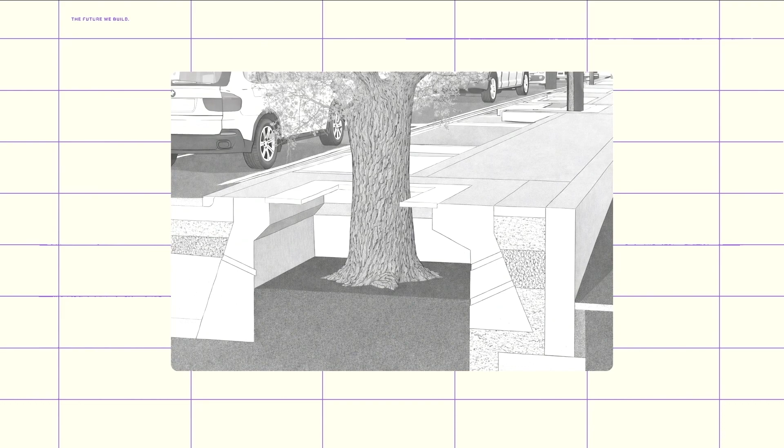We have to find every little nook and cranny in the city to hold water. Our roads have to trap and store water underneath them. If this parking lot was changed to be a filtration system rather than cemented asphalt, we could be storing water there, and it could be trickling slowly into the aquifer when there's space for it to sink in. We need to find environmental flood mitigation solutions that also provide a benefit to society, like parks, like green space, like walkable neighborhoods.

Giralda Plaza is the nation's first living street. That is a system of porous paving and subsurface soils. It's a plaza, a lot of concrete, a lot of stone, but underground it has all the systems of the urban forest. This space is resilient because of how much water it's able to absorb, much like the wild places of the Everglades.

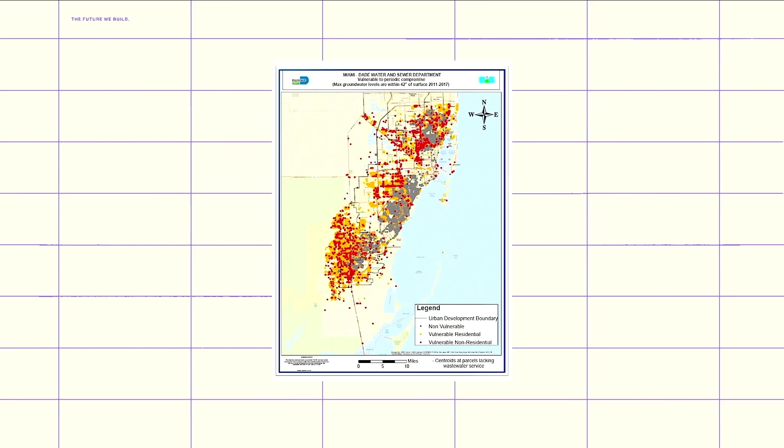We have multiple types of infrastructure that are already failing as a result of sea level rise. So septic tank is one of the ones we have an answer for. 50,000 plus properties in Miami-Dade County in 2025 don't have proper waste infrastructure in their homes because the groundwater level is so high and so close to their septic tank, it's not being cleaned. And that's both a public health risk and an environmental risk.

It's estimated that to get all 120,000 urban septic tanks removed, it would cost about $4 billion. If we don't...

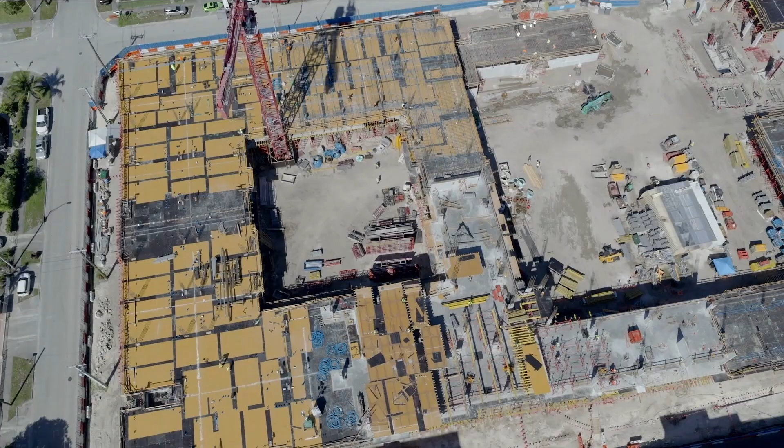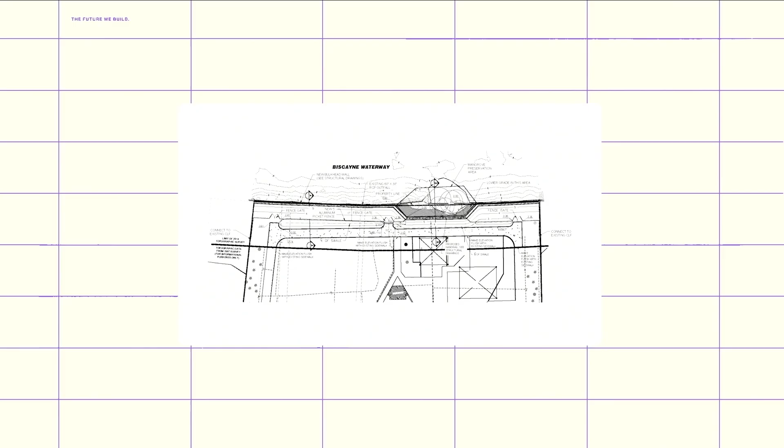We need planners working for our cities with that mindset. I think there's a lot more talking about the plans and the problem than there has been actual money towards investing in fixing the problems. We haven't seen comprehensive plans. Without a plan for what we want to do, it's hard to attract money to pay for that plan.

It's been made very clear by our federal administration that it's up to the state. I'd rather see the states take care of their own problem. And the state is going to tell us it's up to the locality to determine what the best path to resilience is, because that resilience is very localized.

You need to get all of those people to come together and say, we need to produce a bond issue to pay for it, which is then going to increase our taxes. But we're going to get that done to protect our houses.

So there's a need for shared thinking and action beyond what we are accustomed to. It will require an educated community that cares about the issue. Doing nothing will be the most expensive thing we've ever done, and we'll learn that in 50 years. The Miami of the future and the way things are now is a Miami that won't exist, because at some point, it'll only just be a few people here that can live in this place.

We have to think differently about what infrastructure looks like, what an urban landscape looks like, and how we tie nature and green spaces in. So we have to create new economic models that are dynamic, much like nature, and able to work with the cycles that nature has. We have examples that this is possible and that this works. We need to be deploying this at scale and really thinking differently about how we're building the future of Miami.

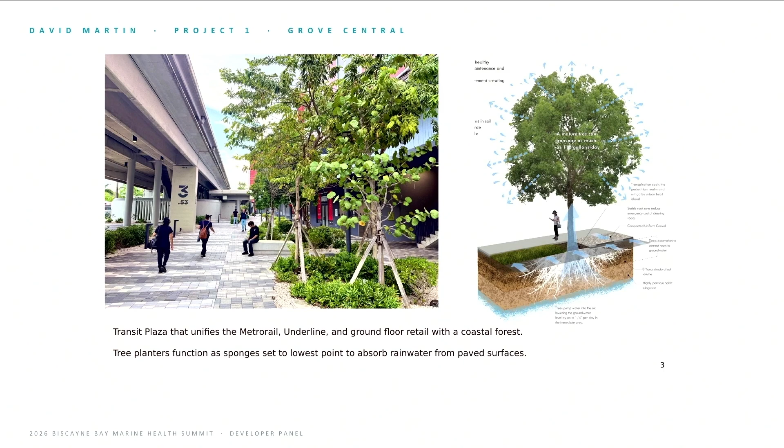This was an ancient pine rockland—100 years ago, where the Metrorail was built. A lot of this was regenerating both some of the pine rockland, from a biodiversity perspective, but also bringing some of the coastal natives along this ridge to support the pollinators that follow the coast. We even put a cliff forest in this project, a forested facade—Miami's first, similar to what you see in Milan, focused on natives. The goal is finding ways in the most urban and civic environments to weave nature into it, giving it a position even in its wild form within the frame of the city.

So this is active city making. This is a TOD, a county ground lease. We built 400 apartments that have some affordable and workforce units in them, and we created a lot of jobs, orienting all the retail—there's a Sprouts grocery market, et cetera—to the Underline, which Juan will talk more about, and the transit station, which I think was pretty cool.

This is a new concept that Walter's pushing me to think about, which involves two things: one, how do we manage stormwater, and how do we clean the stormwater so we could start getting some fresh water into the bay?

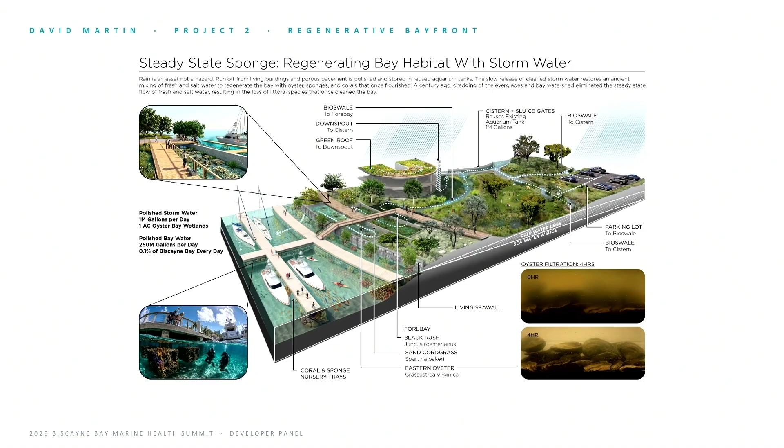What that would result in is a plume of clean water coming off these docks. So you'd have a net positive impact for about a $2 to $3 million investment per marina. That's not a lot of money relative to the types of investments, and that's just the salt water side. We're talking 250 million gallons a day being polished per marina.

But now we shift to the freshwater conversation. Can the buildings be living systems? We're managing water from the sky to the ground to the bay. And the reason we don't have oysters anymore in the bay is we've dredged out all of our channels, so we lost the steady state flow.

So the meme for the day is restore the steady state. Bring back the fresh water, let it flow slowly into the bay, not too much fresh water after it rains and not enough in between. Then we get those oysters that do all the incredible work we know oysters do, 2,000 gallons per day of polishing. You see a photo on the bottom right of 4 hours of polishing in a 1 cubic foot of oysters.

So we have these tools, but we have to support the ecosystem to give us those ecosystem services. And we have to work upstream of the financial decisions. We have to put science at the beginning of the financial decisions, and that's done in legislation, but also working in the marketplace through public-private partnerships so that science, art, design are all up front and not on the back receiving end when all the financial decisions have been made.

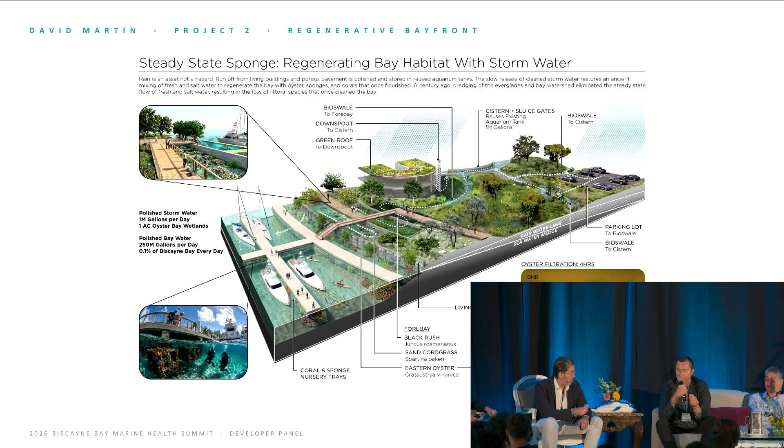Juan, you've been involved in the design and planning of the Shoreline project, and I learned from you that this is possibly the largest infrastructure project in the country that reclaims impervious asphalt and turns more than 11 acres into permeable, usable public space. Can you please take us through the design thinking process for the Shoreline?

Sure, thank you. So I don't have all the numbers like Walter. I don't know if you wrote them all down. I wish I had a notepad.

To us, it was a very simple and very clear opportunity. We had this opportunity to work on it with David and Gene Stearns, who brought us in with a crazy notion, which was how do we change the way that the Rickenbacker Causeway works. If you've ever worked with infrastructure of this magnitude, you'll know how difficult it is to work with different agencies. But for some reason, and this is one of those things in these projects, you never know if the stars will align. In this one, they did.

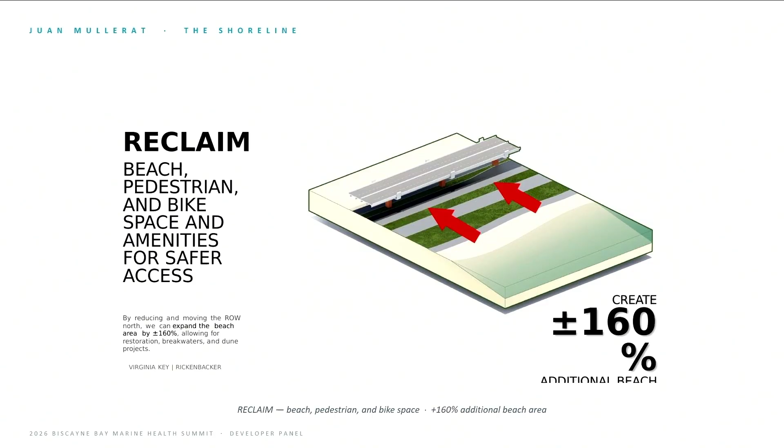There are other nicer places, so the goal is very simple: make that a destination, a real beach, a place where we can remove some of the infrastructure impact that the current causeway has. Push it up onto a viaduct, and in that way gain a whole bunch of open land underneath that could be devoted not just for people, but also for the ecosystem to reclaim the area that really should be for pedestrians and bikes instead of cars.

Currently we have 48,000 trips going from one end to the other of Virginia Key, 28,000 of which are just going directly from inland to Key Biscayne. If we were able to remove only those 28,000, we could increase the amount of space and reduce the volume of cars on the ground, slowing them down to the point that it could be, as a commissioner called it, a residential street—really a calm access road that would be friendlier to bikes and pedestrians.

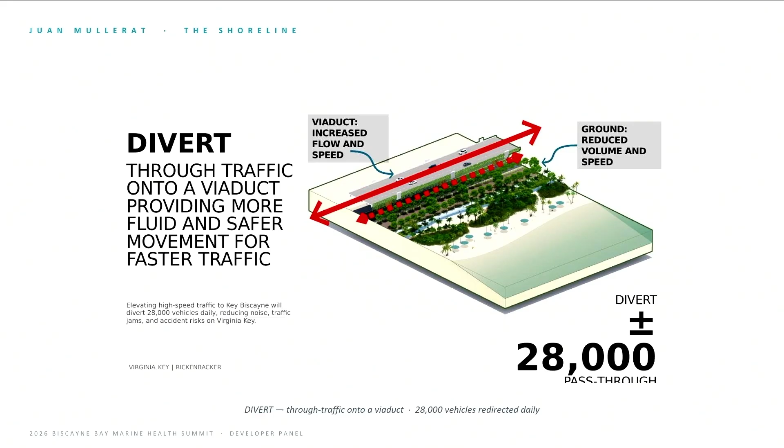So as you can see, I'm giving you some numbers, but the idea again is very simple. The amount of space that those 9 lanes take on the ground level could be really wonderful—is that my last slide? I had some really sexy renderings, I don't know where they went. But this is a project that is ongoing.

It's a public project. We're working together with the Underline—the reason it's called the Shoreline, well, I guess I don't have to tell you, you're all smart people. It's what we call the little sister of the Underline, an extension of it. Right now the Friends of the Underline are working with us together with engineers, and we're working with the Village of Key Biscayne, the City of Miami, and the County to figure out whether or not the project is feasible.

The good news is that we are halfway through the project and it's still feasible.

Eventually what we're going to see is that we'll be able to provide not only a larger beach for enjoyment, but also additional dunes. The ecosystem can then be restored. A 20 to 35 foot wide multimodal trail, similar to the Underline, and then additional parking and additional bike lanes that will go along the causeway street underneath this viaduct.

The project will also add amenities, which that area currently lacks, and it will reduce the crossing distance for pedestrians and students. If any of you have been to Mast, at lunchtime the students cross those 9 lanes to get a taco. That only goes to show how terrible school food can be, because they take their lives into their own hands to cross that thing.

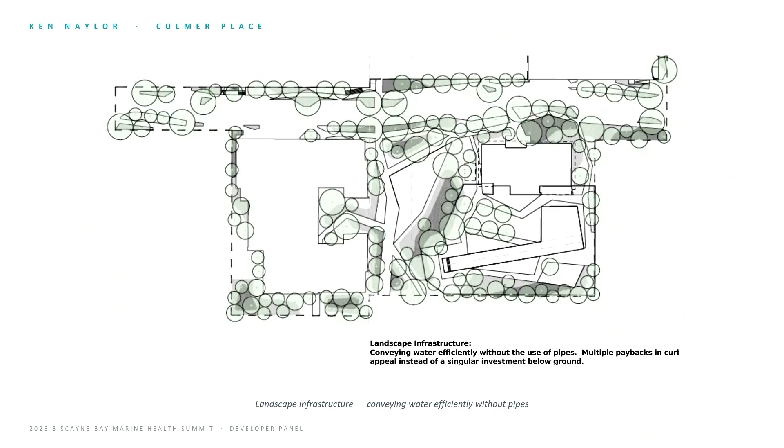As a funny aside, we did have one federal government employee come down from Washington and look at the design of the rain gardens when it was just conceptual and go, I don't know, is this going to be safe? Are the kids going to fall in and die? So there is resistance to this stuff. David talked about some drainage systems you don't know whether they're going to work until you actually implement them. People don't understand that humans can live without every inch being paved.

This image shows how the superblock was broken with this north-south spine running through the site, and that was very important from a planning standpoint, just to be able to reintroduce normal pedestrian and vehicular traffic through the site.

The pool that you see depicted there is really a piece of pride for the residents. They never had, historically, access to pools. Many of them never learned to swim as a result. So the fact that we were able to deliver them a pool was a big deal.

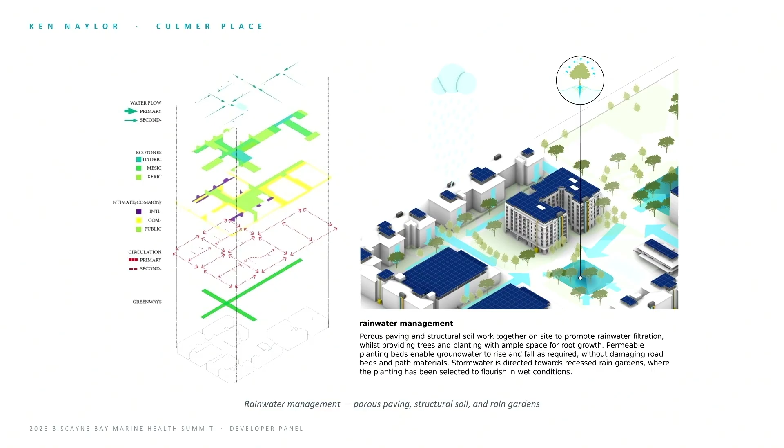As you can see here, there's a rainwater management system that Walter designed that creates a lot of porous paving, structural soil work, and the rain gardens that I mentioned previously to divert the water to the right places.

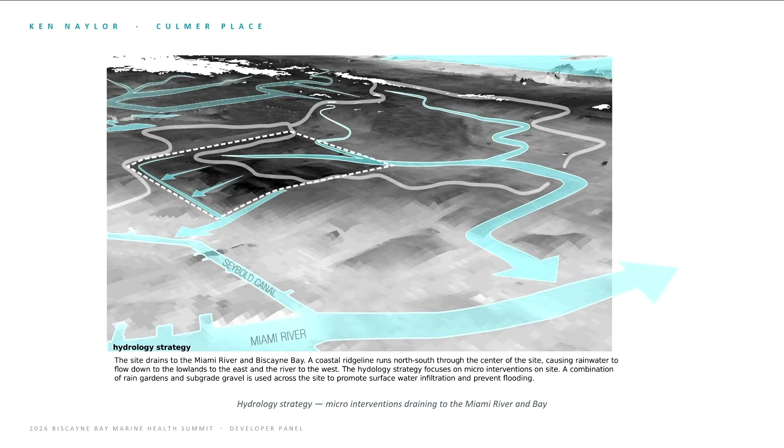I think this is probably the most important slide. The hashed line around the perimeter shows that original super block. And it shows that there was actually a big topographical difference between the different sides of the site. There was sort of an ancient river on one side and then lowlands on the other side, and this coastal ridge running down the spine.

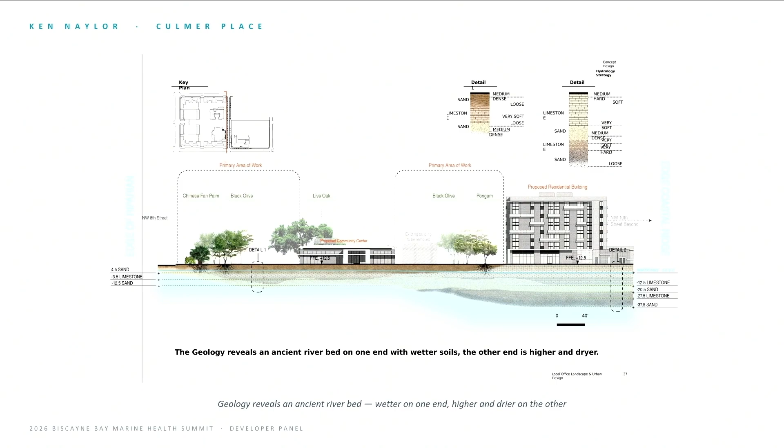Because of those different soils, we looked at using different trees across the site as well. And you can see those trees there.

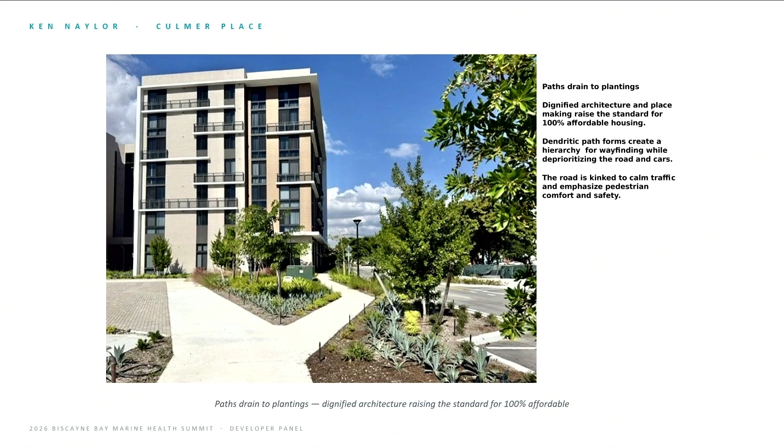So this is the finished product. As I said, the paths drain into the plantings, which you'd be surprised is not necessarily what normally happens on a site when you go to a standard landscape architect in Miami. One of our goals is always to also make it be sort of indistinguishable from a market rate apartment complex. I think we met the mark here.

And the other cool thing that Walter did is in reestablishing the street grid, he also curved the road to make it a little bit more interesting and human scale and slow people down.

There's some of the porous paving. So just to wrap up quickly,

That important slide that I showed you, this site fits into a larger hydrology, right? And that was the insight that none of the other designers I'd worked with before Walter really saw immediately. And that understanding what you're draining into and how to keep things on site is critical. You're supposed to keep things on site as a developer, but how you do it creates a profound impact on the environment. Thanks.

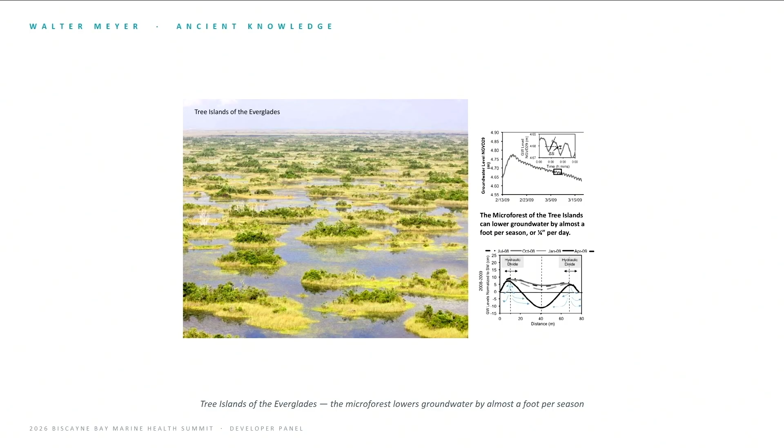The Miccosukee planted these trees out on midden mounds - their own oyster shell waste mounds. The oyster shells were what we call today structural soil. They're about 40% void, which allows the tree roots to grow into that groundwater.

So I think it's important that when we design cities, we think about that science and that ancient knowledge, and how you design an entire corridor, an entire district in a city that has that same ancient system, but looks like a civic landscape of the future.

Miracle Mile today opened about a month before Hurricane Irma hit, and it was tested by Irma, one of the heaviest rain events in Miami's history. It used to be a soggy district - a lot of the high-end shops would flood every summer rain.

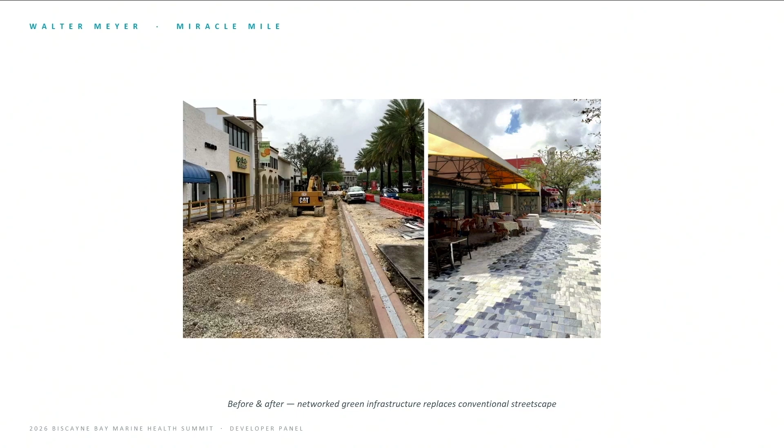But in order to build Dr. Cinto's tree island in downtown Coral Gables, we had to excavate that urban crust - that 3 feet of fill that's all over Miami below our buildings - so we could reconnect the trees to the groundwater. We're at elevation 8, which is high ground for Miami, but the groundwater during high groundwater season starts to get up into the root zone of the trees. So that was our opportunity to have a check and balance system - when the water's super elevated in October, the trees start to suck it down and cool down the atmosphere.

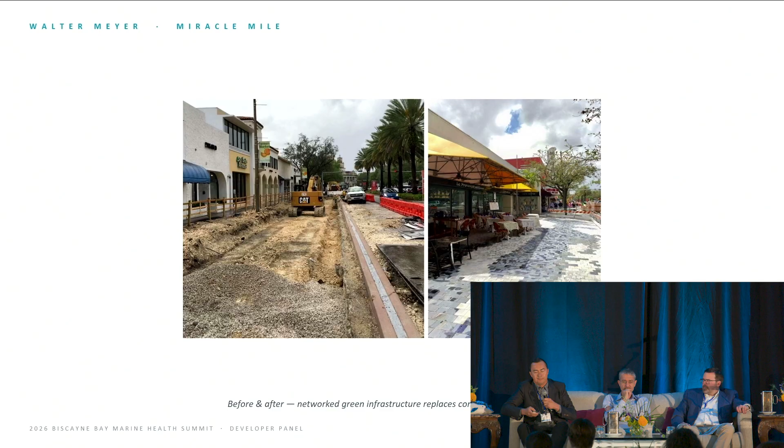In Giralda Plaza, Miracle Mile was a partial living street. The travel lanes were not structural soil, but Giralda Plaza was, facade to facade, a complete living street. It's about $48 a square foot to build that, including all the art infrastructure.

Every time you go to Giralda Plaza, there's seasonal art that's curated. There's an incredible Mexican artist who did some beautiful yarn work that's open today. Go check out Giralda Plaza - you can see that work here, it's gorgeous.

Now, Hurricane Maria struck Puerto Rico. Years before Maria, we designed a 2-kilometer coastline with a $55 million budget with the mayor of Mayagüez - the 3rd largest city on the west coast of Puerto Rico - and the governor of Puerto Rico at the time. On the site, there were stormwater pipes flowing into the bay, and the bay didn't have that Caribbean look you'd expect, the clear water, because of this effluent.

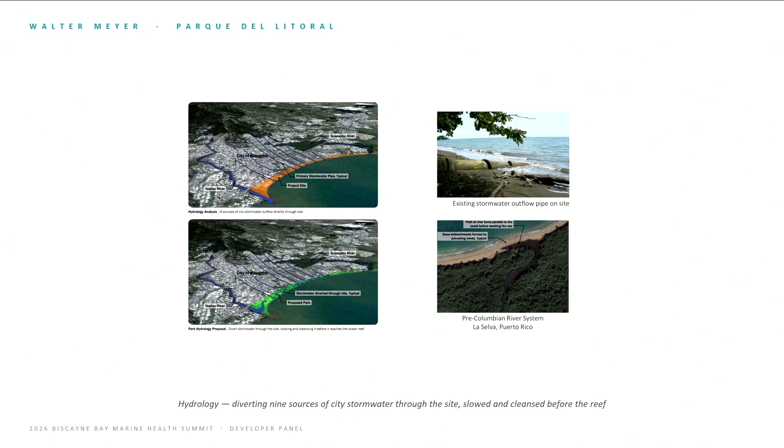Yet they didn't have a budget to treat this. But there were cost-efficient ways that EPA had developed through phytoremediation wetlands, which we developed as Puerto Rico's first pilot, in order to convert those stormwater pipes into modern city versions of these ancient exchanges between fresh and salt water.

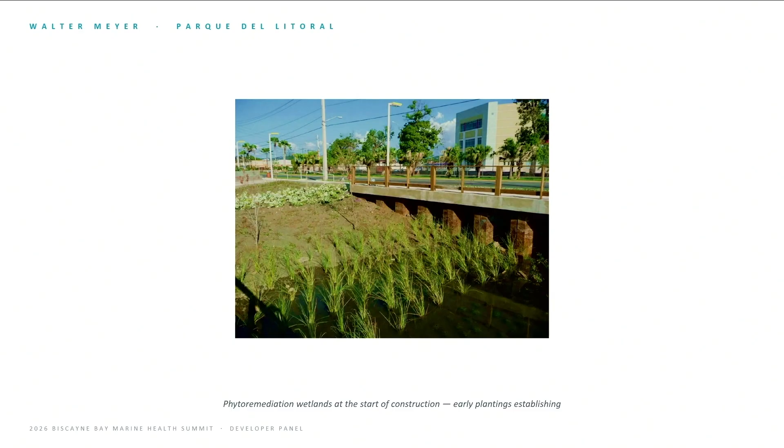This project is almost 20 years old now. My firm is 20 years old, and we were founded by this project. It's a hybrid approach, we embedded a sheet pile wall, gray infrastructure and green infrastructure together. We have oysters, we have mangroves, and those pipes that were on the beach, you can see on the right side, it's snipped back. We edited it back and sized the wetlands to be able to polish this.

So this is a dense city, a colonial city, a historic city, several hundred years old, older than the country. And the question is, how do we make space in our cities? We have to work under the city, and sometimes we have to buy real estate and create space through pocket parks.

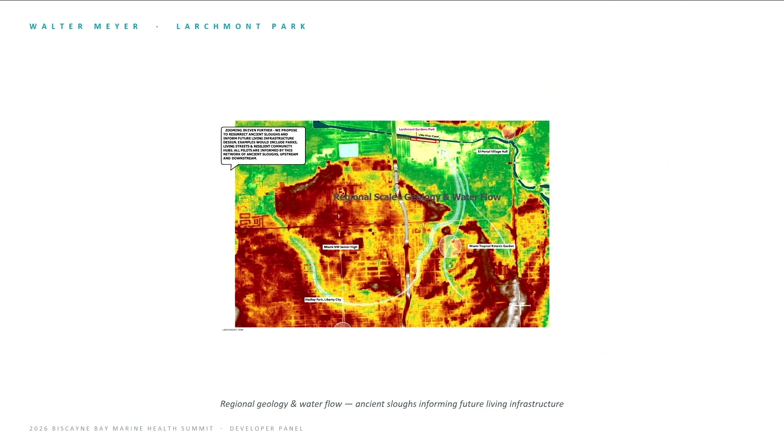I'll close with this last project that we worked on with Rachel Silverstein from Waterkeeper. They did a massive citizen outreach on ideas, and this was one of the top ideas: to take a watershed approach to one of the low-lying zones, Larchmont Park, and work across agencies, including South Florida Water Management District. I don't know if Catalina is here today, she's one of our contributors.

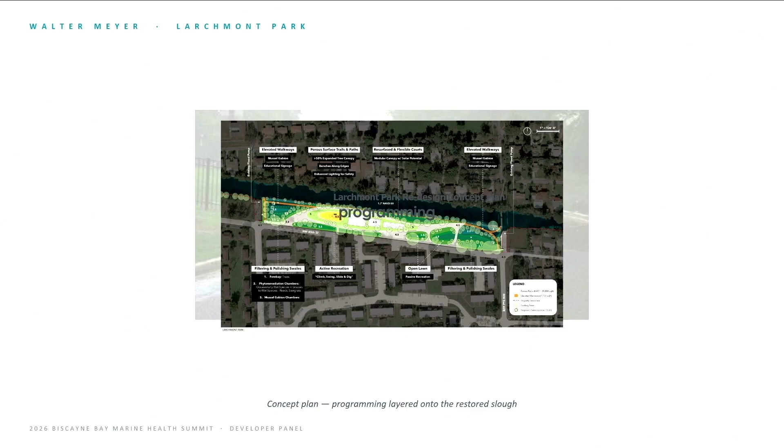This was taking a county park at the pour point of a watershed, where ancient Everglades sloughs were flowing and pouring into this point, and turning that park, with a budget of $14 million, into a massive sponge. It requires that same excavation and then rebuilding the park on top of that.

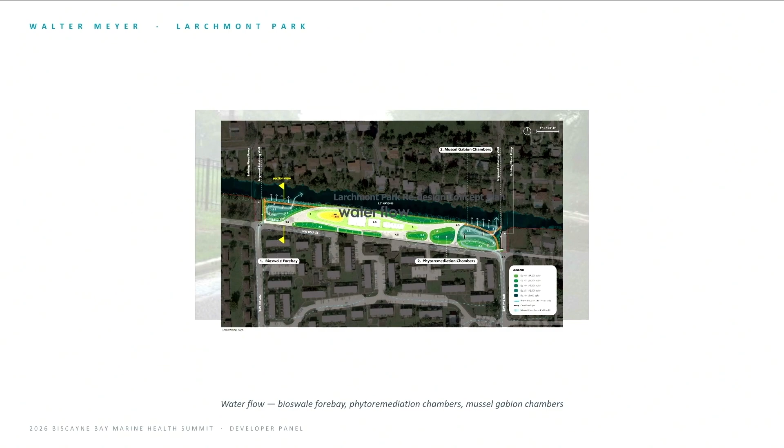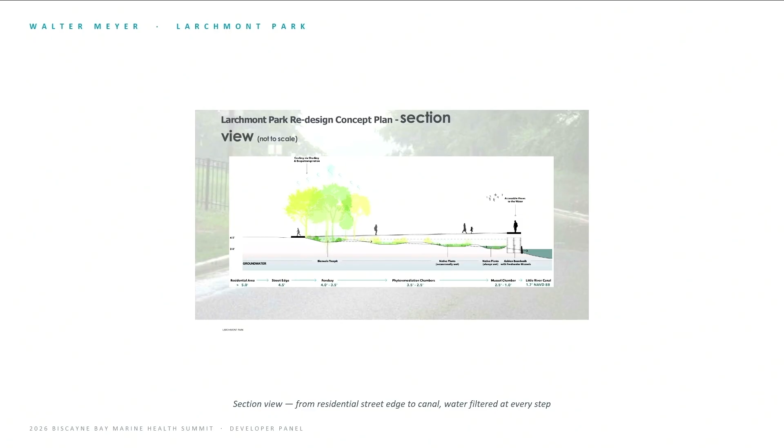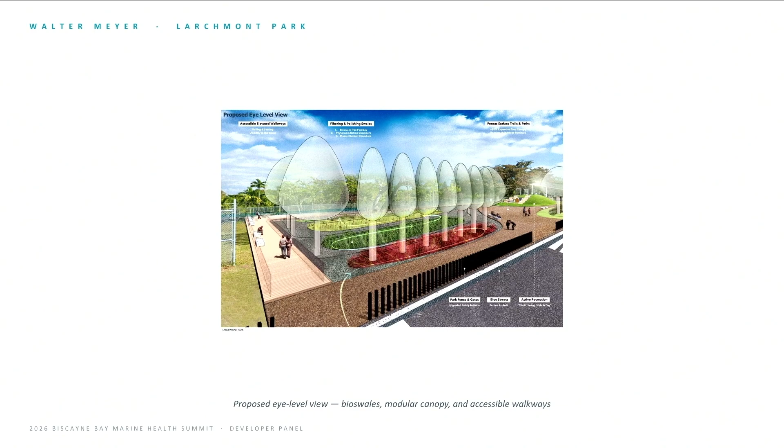So there's no excuse, whether it's fresh or salt, there are ways to unleash nature to do what nature does, but you have to make room for it and find ways to supercharge it. And then, of course, all the cultural needs the community determined are required for this park, ball fields and playgrounds and such. So I'll leave it there.